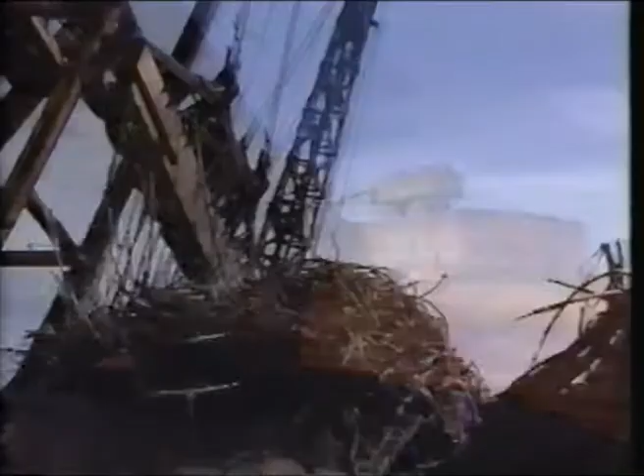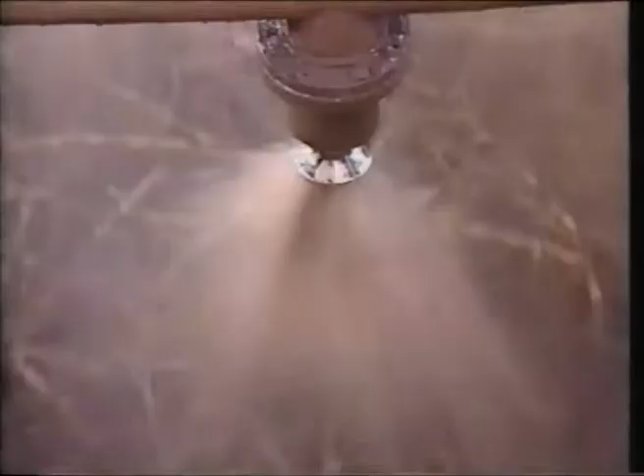The Puunene Sugar Factory is installed on Maui Island and belongs to the Hawaiian Commercial and Sugar Company, a property of Alexander and Baldwin. This factory processes around 8,000 tons of cane per day. The average season in Hawaii lasts 200 days for a production larger than 200,000 tons.

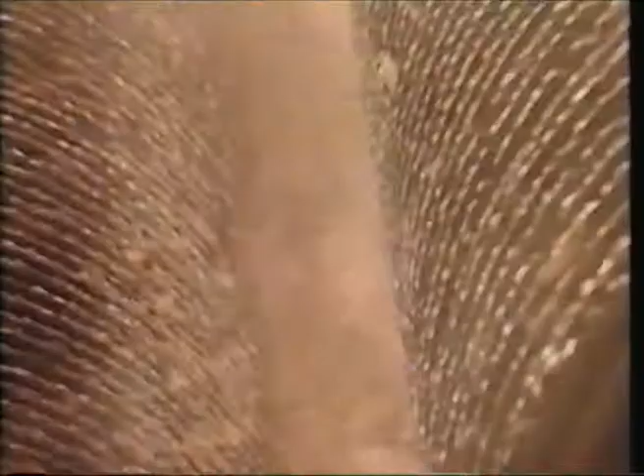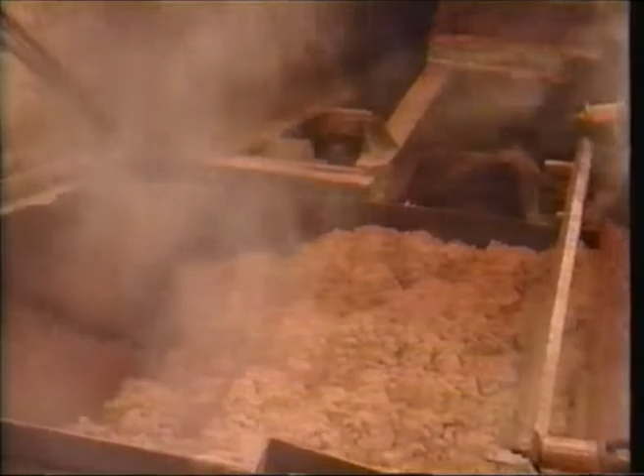On Maui, they harvest the cane with a bulldozer, which necessitates washing it as soon as it arrives at the factory. Both tourism and cultivation of sugarcane devour huge amounts of land area. Each year, Maui sees a decrease in its sugarcane crop. From this dilemma came the idea of increasing sugar production through recovery of the sugar contained in molasses.

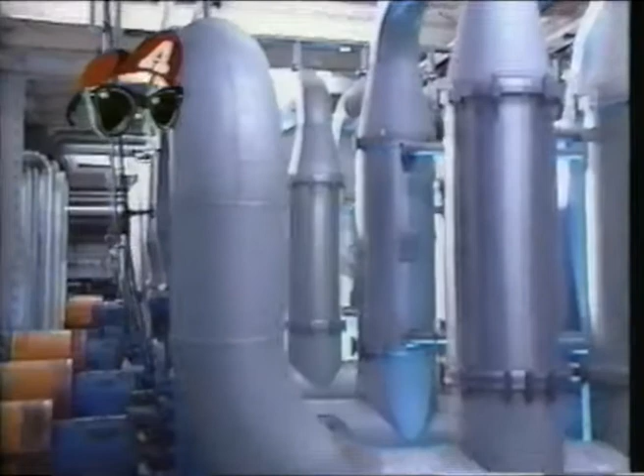Today, we know there is no problem in accomplishing this with beet molasses. To do this with cane molasses, however, is something else, since cane molasses must have a perfect filtration and be calcium-free. So that is nap? Yes and no. Nap is in fact a group of processes, the heart of which is ultrafiltration. Ultrafiltration is a cross-flow filtration through mineral membranes which are composed of a layer of zirconium oxide on a ceramic body.

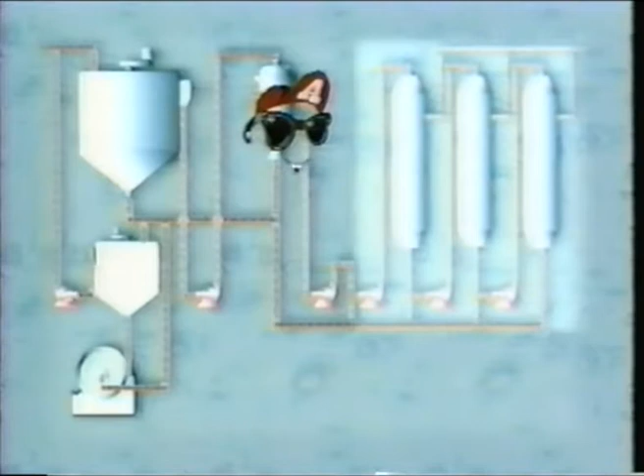Ultrafiltration is to the cane industry what carbonation is to the beet industry. It is a foundation, it is a basis. It represents the fundamental principle for a process which will allow future developments. Ultrafiltration is installed at the outlet of the clarifier. A safety filtration protects the membranes.

The clarified and filtered juice passes through membranes and exits purified. It is the permeate. Impurities are concentrated in retentate, recycled to a secondary clarifier, then to the primary clarifier. The safety filtration is essential for the protection of membranes.

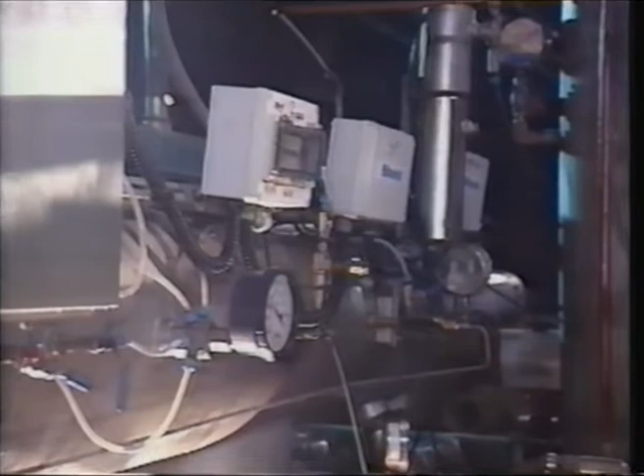The ultrafiltration progresses in 3 concentration stages. This is the first stage, with its recirculation loop and its powerful pumps, since cross-flow filtration is used. The permeate and retentate outlets from the circulation loop. Finally, the ultrafiltration modules installed on either side in the circulation loop. No more turbidity or macromolecules.

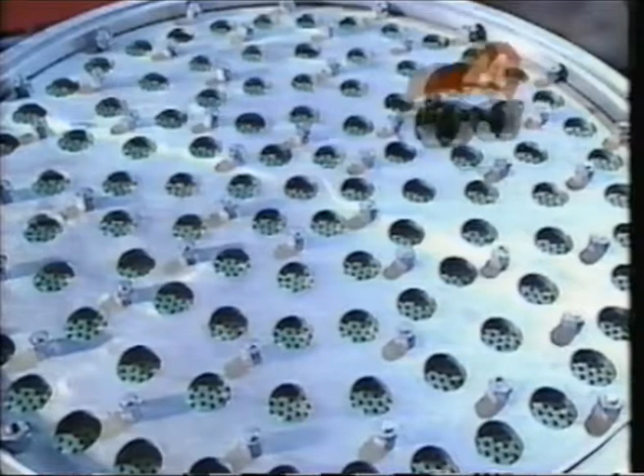But I don't understand. Look, this is a TechSep membrane. 99 membranes are placed in a module. The modules are placed in the circulation loop. How did you get the idea? Well, it all started with Robert Kwok, vice president of the Puunene Sugar Factory.

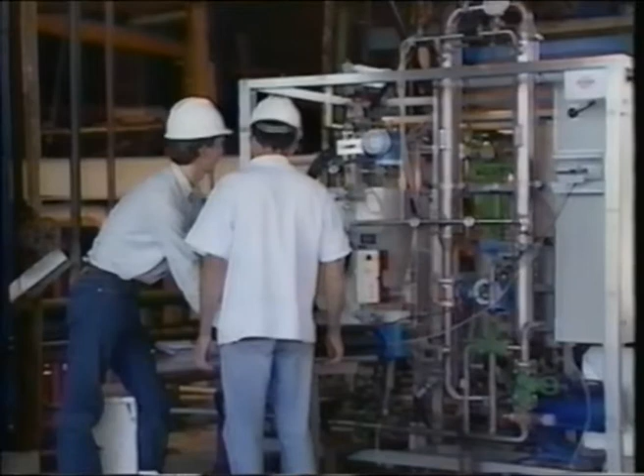HC&S installed the new Applexion process in September 1994, and we've worked for 6 weeks during the 1994 season. This year, we started with the new system in March. It's still running, and very, very efficiently. This process was developed on an industrial pilot plant, and studies lasted over a year.

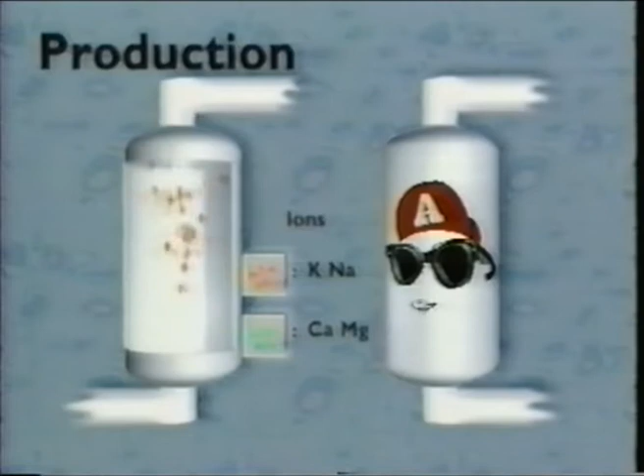Until now, cane juice could not be softened. Calcium salts scaled the evaporators, which forced frequent shutdowns of the plant for their cleaning. Thanks to softening, boil-outs are a thing of the past. How is it done? Well, the juice flows through an ion exchange resin which fixes calcium and magnesium while releasing potassium and sodium ions. So, it's possible to remove calcium and magnesium from cane juice.

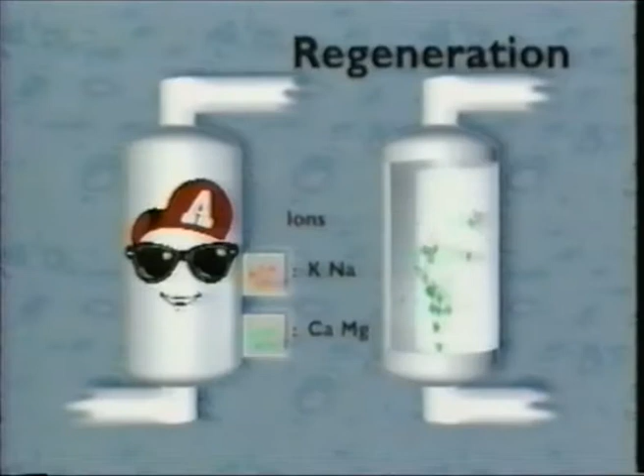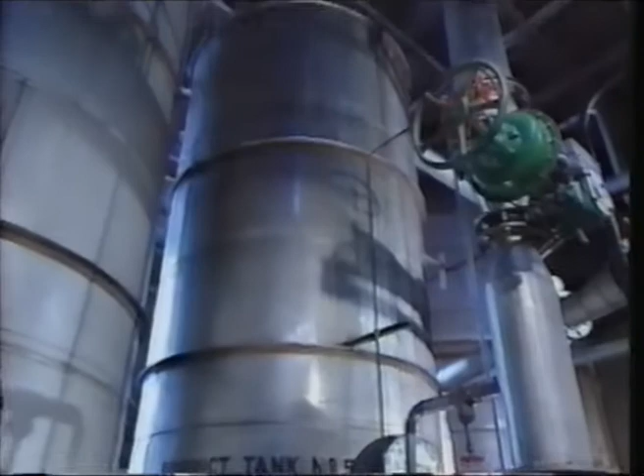I was very impressed with the equipment I saw in this factory. I am really impressed with the results given by the new process installed in this factory. This is extremely interesting new technology. I think that this new technology, the new Applexion process, is on the cutting edge, and I think somebody in this industry should be interested in taking it.

Sugar people from the world over who have visited the Puunene plant are unanimous. Production of plantation white. Energy savings. More sugar extraction. The nap offers many other possibilities, like for instance the production of refined sugar.

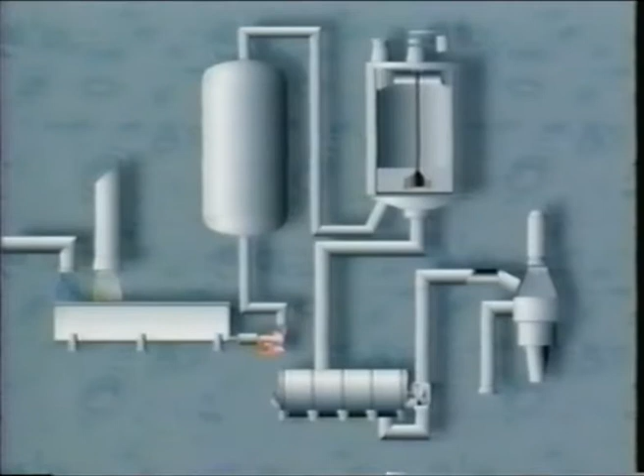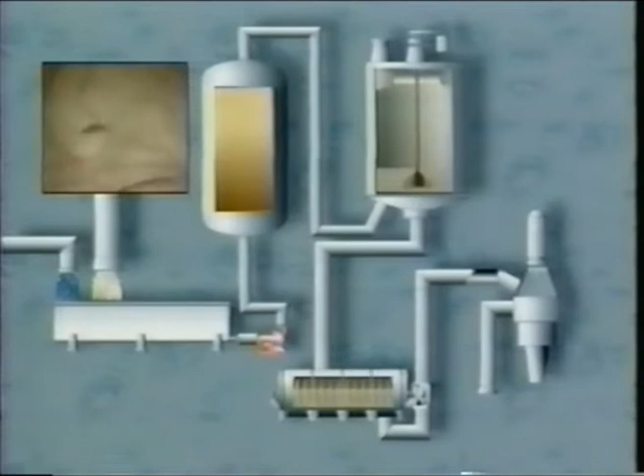After the melting of plantation white sugar, the syrup is decolorized on ion exchange resin. Then the sugar is crystallized again, giving a refined sugar of the highest quality, the color of which is lower than 45 ICUMSA units. If this remelt is demineralized and decolorized on a mixed beds column, sterile filtered, then concentrated, one gets liquid sugar for the soft drinks market.

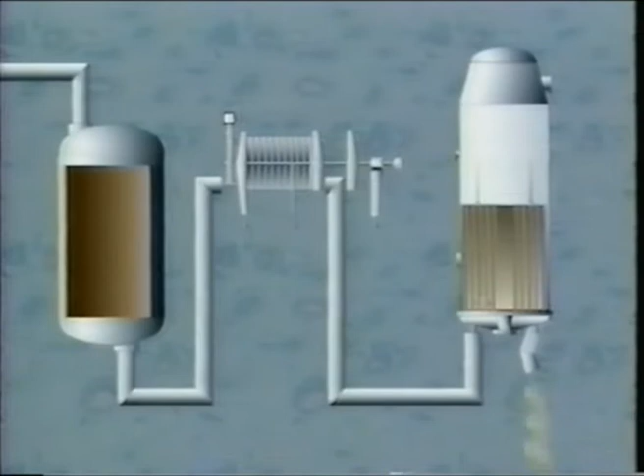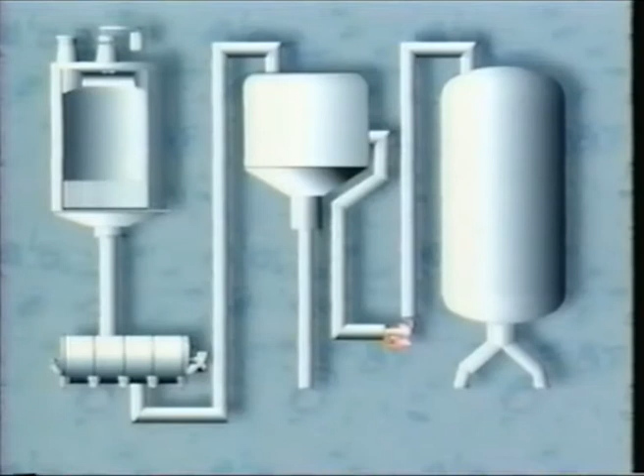The softened molasses can go through a chromatography on the cationic resin under potassium form, allowing separation of sugars and non-sugars. This technology allows for the recovery of up to 90% of the sugar contained in molasses. The development of the nap and the application of these processes require, due to the variety of the cane, an industrial pilot plant carefully managed by the Applexion R&D teams.

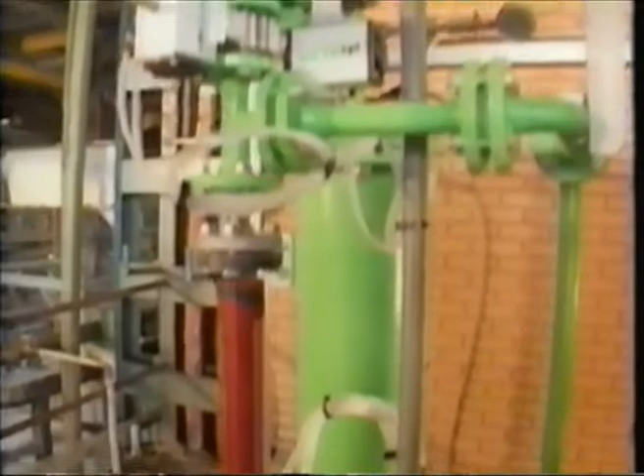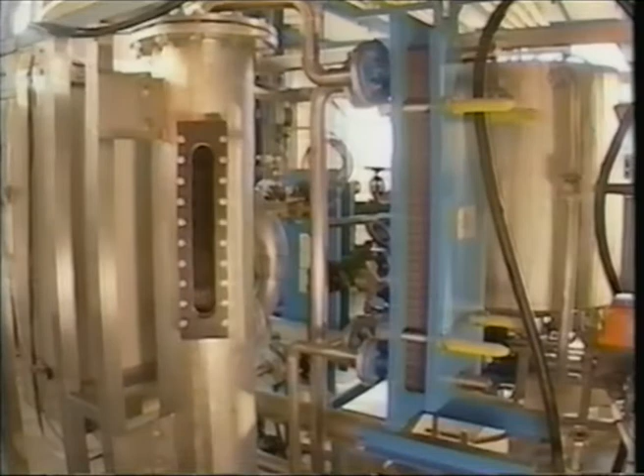The industrial pilot plant includes an ultrafiltration unit, a softener, a concentrator, and a micro-vacuum pan to check the quality of the resulting sugars. The nap is a true technological breakthrough, which will allow the cane industry to increase its production and envisage new developments thanks to molasses desugarization, refined sugar, and raw sugar production. Women and men of Applexion are proud to have participated in this determining innovation.